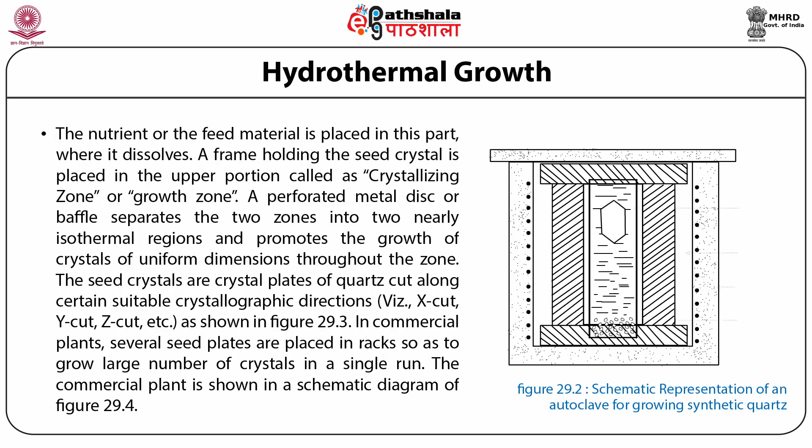The seed crystals are crystal plates of quartz cut along certain suitable crystallographic directions, namely X cut, Y cut, Z cut, etc., as shown in figure 29.3. In commercial plants, several seed plates are placed in racks so as to grow a large number of crystals in a single run. The commercial plant is shown in a schematic diagram in figure 29.4.

After the vessel is charged with solvent to the percent of fill desired, it is closed and placed in a furnace that gives the desired temperature and temperature differential. The moment the temperature of the vessel reaches the operating conditions, the nutrient quartz starts dissolving and saturating the solution.

Circulation results from convection currents, since the hotter zone is arranged to be at the lower part of the vessel. When the solution rises into the cold region of the vessel, that is the upper part, it can no longer hold all the dissolved material in solution and the excess gets deposited on the seed plate.

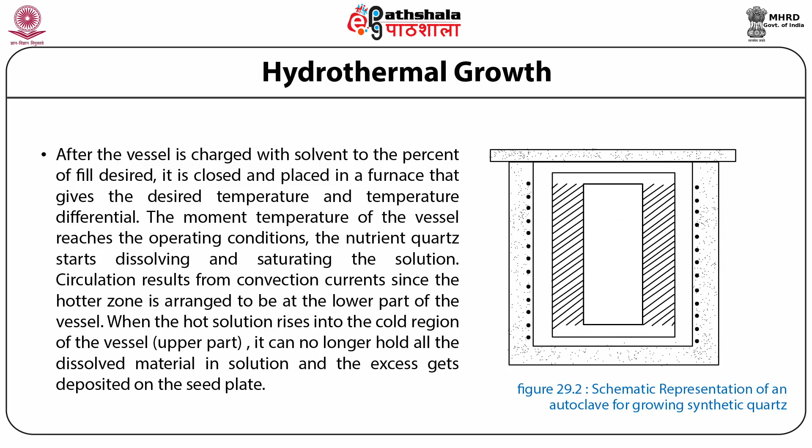The seed plate begins to grow in size. Replenishment is influenced by the baffle arrangement as it transports newly saturated solution away. This continuous cycle of solution and deposition permits the growth of large crystals.

The rate of growth depends on temperature, pressure, the temperature difference delta T between the top and bottom of the autoclave, and the amount of mineralizer present. The actual conditions used for the growth of quartz are to be compromised, in which various factors are balanced to provide the best possible material at a realistic production rate and cost basis.

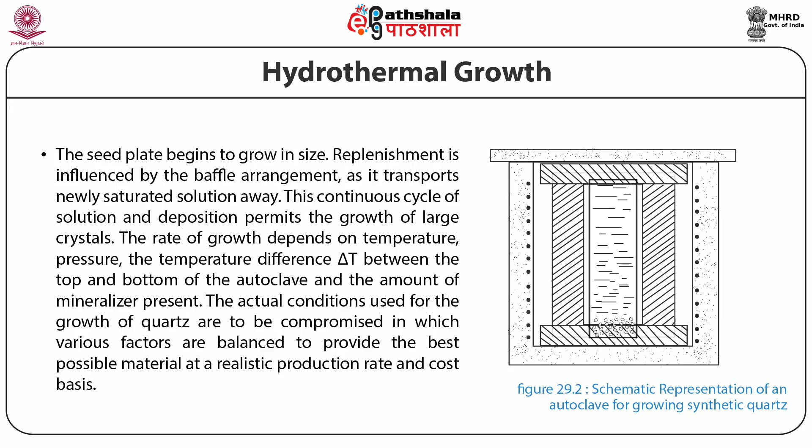Figure 29.3 shows the model of a quartz crystal, showing the different directions of cutting to produce oscillator plates of different characteristics, also used as seed plates for growing synthetic quartz.

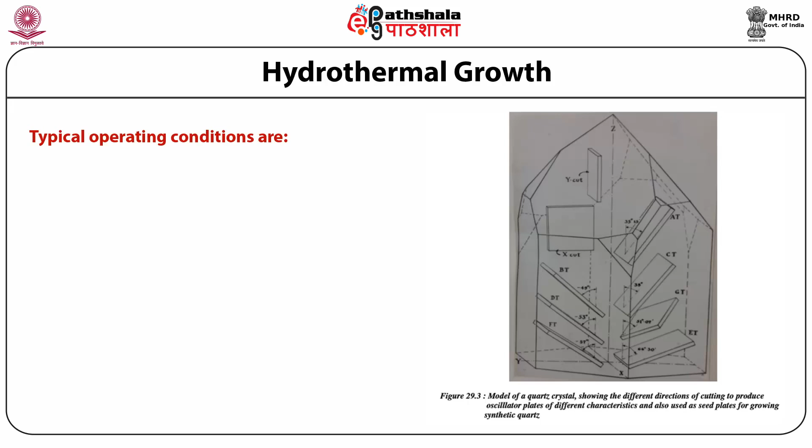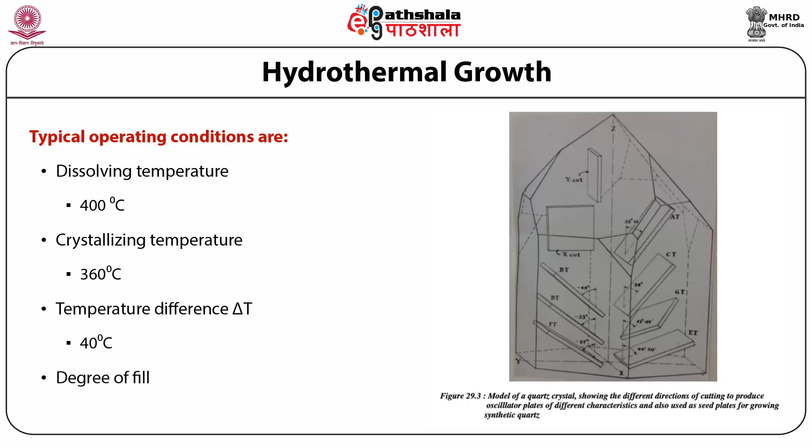Typical operating conditions for the growth of quartz are: dissolving temperature 400 degrees centigrade, crystallizing temperature 360 degrees centigrade, with temperature difference delta T maintained at 40 degrees centigrade. The degree of fill is around 80%, using an aqueous alkaline solution of 1 molar sodium carbonate or sodium hydroxide.

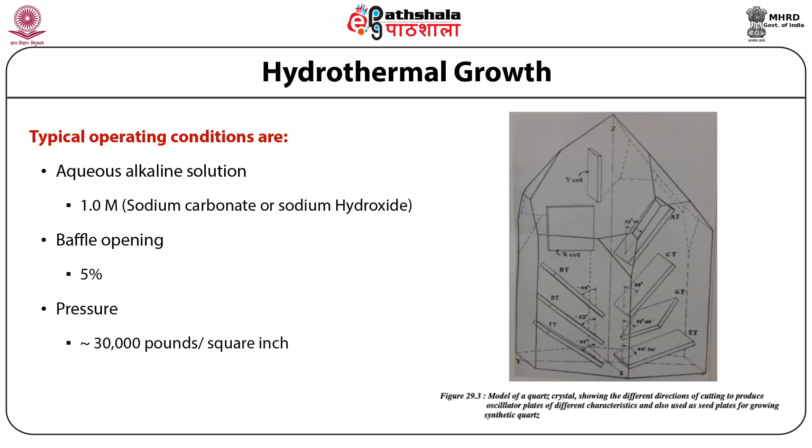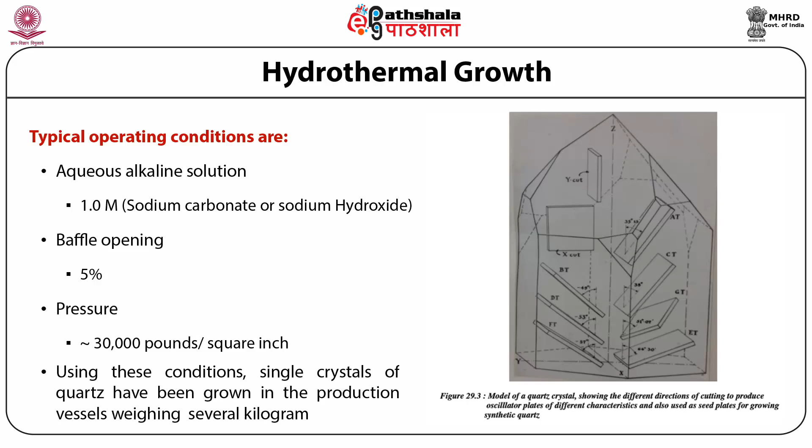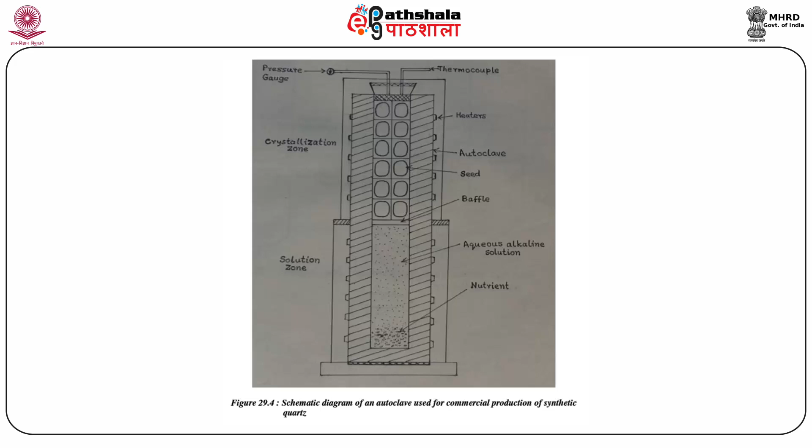Baffle opening is kept at 5%, and the pressure is maintained at approximately 30,000 pounds per square inch. Using these conditions, single crystals of quartz have been grown in production vessels weighing several kilograms. Figure 29.4 is a schematic diagram of an autoclave used for commercial production of synthetic quartz.

Let us talk about mineralizers. The materials grown by the hydrothermal method have either negligible solubility in water or are slightly soluble in water. To increase their solubility, some substances are added. These substances are called mineralizers.

The mineralizers usually used for this purpose include both alkaline and neutral substances. The alkaline substances are sodium hydroxide and sodium carbonate, whereas the neutral substances include ammonium chloride (NH4Cl), potassium chloride (KCl), sodium chloride (NaCl), and so on. In the growth of certain crystals, acid solutions like hydrochloric acid (HCl), sulfuric acid (H2SO4), and HI are also used.

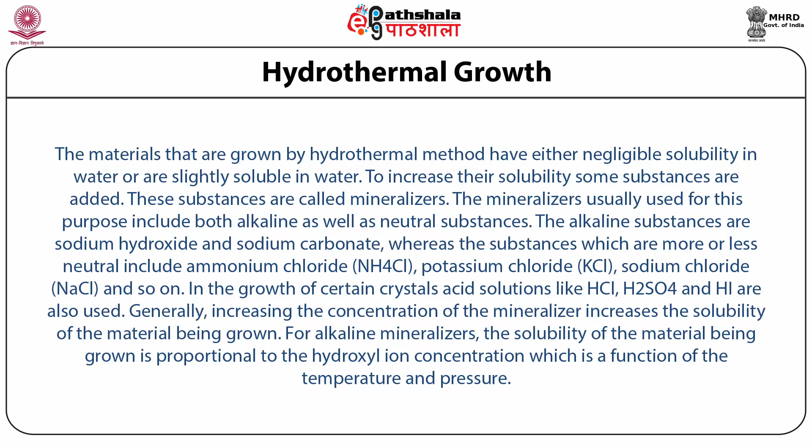Generally, increasing the concentration of the mineralizer increases the solubility of the material being grown. For alkaline mineralizers, the solubility of the material being grown is proportional to the hydroxyl ion concentration, which is a function of temperature and pressure.

Some typical mineralizers under specific conditions are given in table 29.1. This table has four columns: one for the crystal, one for the mineralizer, the third for growth temperature in degrees centigrade, and the fourth for temperature difference, delta T in degrees centigrade.

The first example is SiO2, quartz crystal, for which the mineralizer is 1m NaOH. The growth temperature is maintained at 375 degrees centigrade, and the temperature difference, delta T, is 40 degrees centigrade. For the crystal Al2O3, the mineralizer is...

1m K2CO3. The growth temperature is 490 degrees centigrade, and the temperature difference is maintained at 50 degrees centigrade. For PbTiO3, the mineralizer is 1m KF, growth temperature is 600 degrees centigrade, and the temperature difference is maintained at 35 degrees centigrade.

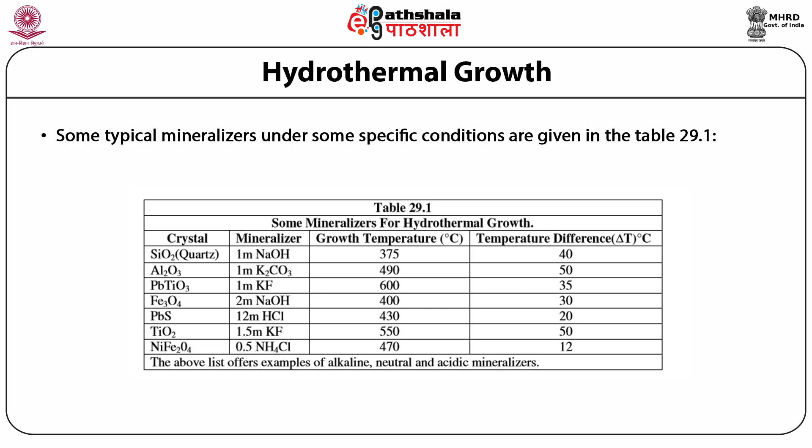For the growth of NiFe2O4, the mineralizer used is 0.5m NH4Cl. The growth temperature is maintained at 470 degrees centigrade, whereas delta T is maintained at 12 degrees centigrade. The above list offers examples of alkaline, neutral, and acidic mineralizers. Now we shall talk about advantages of hydrothermal crystallization.

Hydrothermal crystallization offers the following advantages. First, in hydrothermal growth, one usually refers to a high temperature of crystallization. However, in reality, this temperature is often rather low compared to the melting point of the material. It is this relatively low crystallization temperature that makes the technique an attractive means of crystal growth.

Second, the dislocation density of a hydrothermally grown crystal is less than melt-grown crystals. This is because in hydrothermal synthesis, crystals grow under less thermal strain, whereas in melt growth, large thermal gradients are present. This low temperature also permits the growth of low temperature polymorphs, which are often unattainable by other means.

Third, hydrothermal growth uses a closed system, in which the atmosphere may be controlled to produce oxidizing or reducing conditions. Fourth, in this technique, one can achieve a comparatively rapid rate of growth.

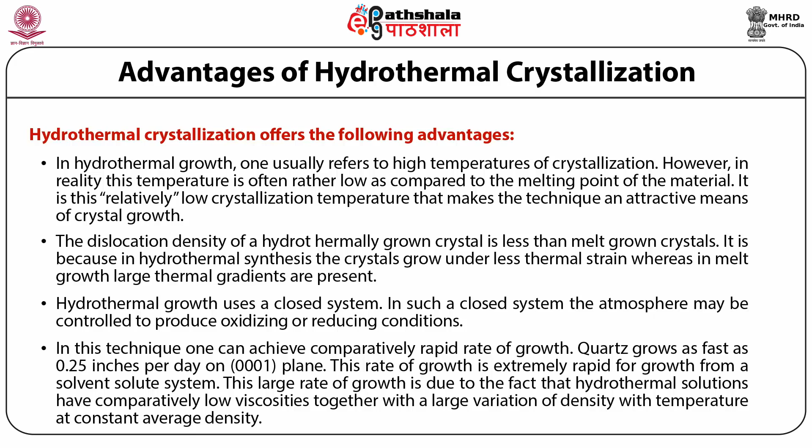Quartz grows as fast as 0.25 inches per day on the 0001 plane. This rate of growth is extremely rapid for growth from a solvent-solute system. This large rate of growth is due to the fact that hydrothermal solutions have comparatively low viscosities, together with a large variation of density with temperature at constant average density. This results in rapid convection and very efficient solute transport, permitting large growth rates.

Now let us discuss disadvantages of hydrothermal crystallization. This technique suffers from certain disadvantages, summarized as follows. First, the need for a well-designed high-pressure vessel with a reliable closure capable of withstanding the high pressure generated at operating temperatures.

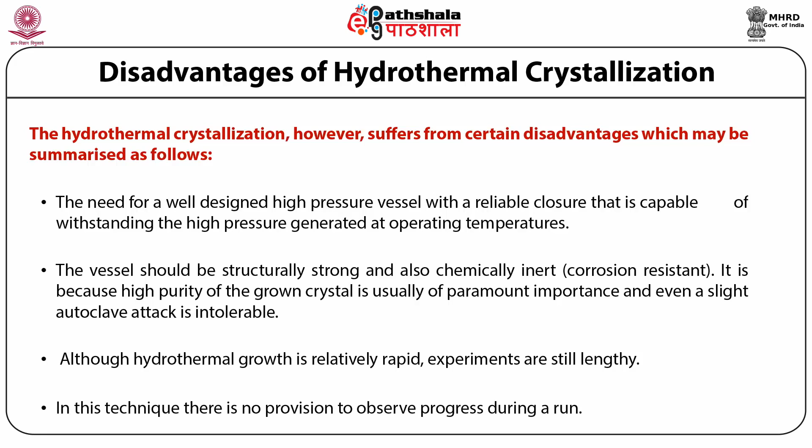Second, the vessel should be structurally strong and also chemically inert, that is, corrosion resistant, because high purity of the grown crystal is usually of paramount importance, and even a slight autoclave attack is intolerable. Third, although hydrothermal growth is relatively rapid, experiments are still lengthy. Fourth, in this technique, there is no provision to observe progress during a run.

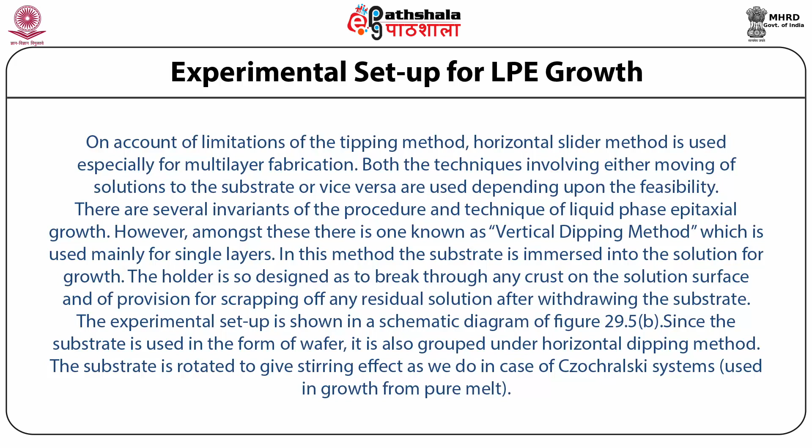The experimental setup is shown in the schematic diagram of figure 29.5b. Since the substrate is used in the form of a wafer, it is also grouped under the horizontal dipping method. The substrate is rotated to give a stirring effect, as is done in Czochralski systems, which are used in growth from a pure melt.

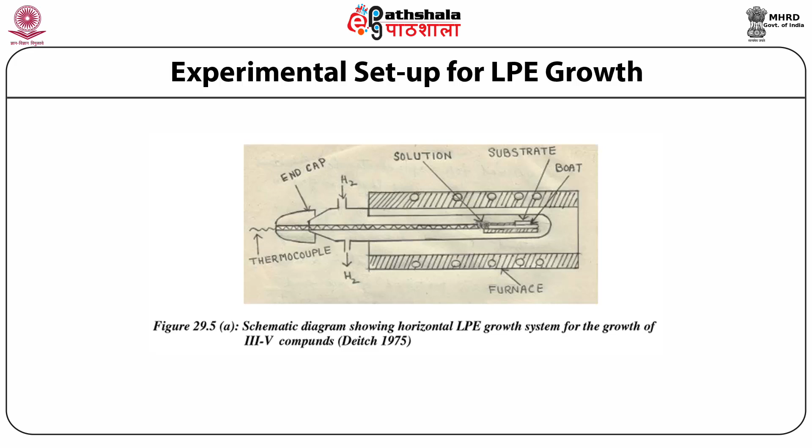Figure 29.5a is a schematic diagram showing a horizontal liquid phase epitaxial growth system for the growth of III-V compounds, as devised by Deitch in 1975. Figure 29.5b is the schematic diagram showing the vertical liquid phase epitaxial growth system used in magnetic garnet growth, as devised by Ghez and Giess in 1974.

Horizontal dipping is used for the growth of semiconducting crystals. However, there are two difficulties because of which the use of this technique is rather rare. The main problems are as follows. First, it is difficult to design substrate holders which provide undistorted flows in semiconductor solutions, on account of the limited range of compatible materials. Second, semiconductor solutions are much less stable in the supercooled state compared to oxide or halide-based solutions. Because of this, spurious nucleation is very common in semiconductor solutions.

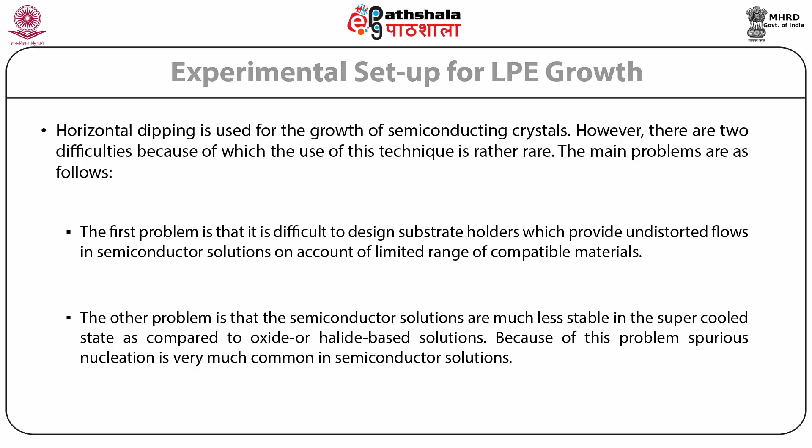The major uses of LPE growth are as follows: use in growth of layers where purity is of utmost importance, as required in the case of semiconducting layers; and use in the growth of materials where practical alternative techniques are not available, as in the case of magnetic bubble devices.

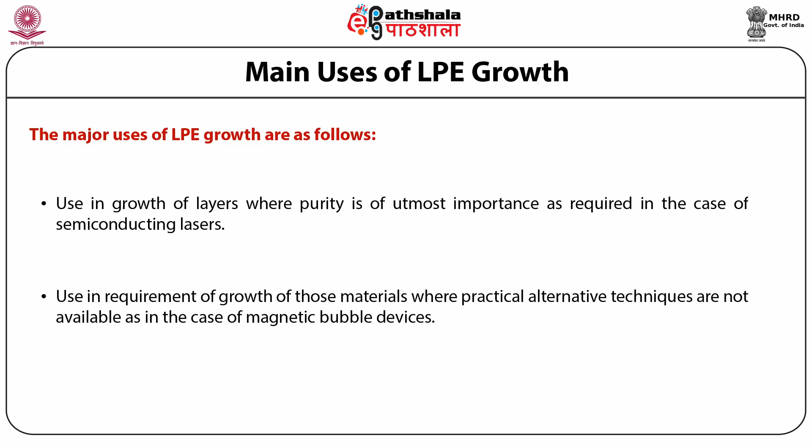Nucleation does occur at appreciable rates at some temperatures, so the eta versus temperature T curve must therefore have a maximum. If a liquid is cooled so fast past this maximum that no nuclei get time to form, it becomes a glass.

Let us discuss dependence of growth rate on cooling procedures. Dependence of temperature T with time on growth rate for the above said cooling procedures, which includes ramp cooling, step cooling, and pre-cooling, is shown in figure 29.6 A, B, and C.

The effect on the growth rate, represented by small v, with time small t, corresponding to each of the cooling procedures, is shown in figure 29.6 A prime, B prime, C prime respectively. In these diagrams, the time small t equal to 0 is taken at a time when the substrate is brought into contact with the solution.

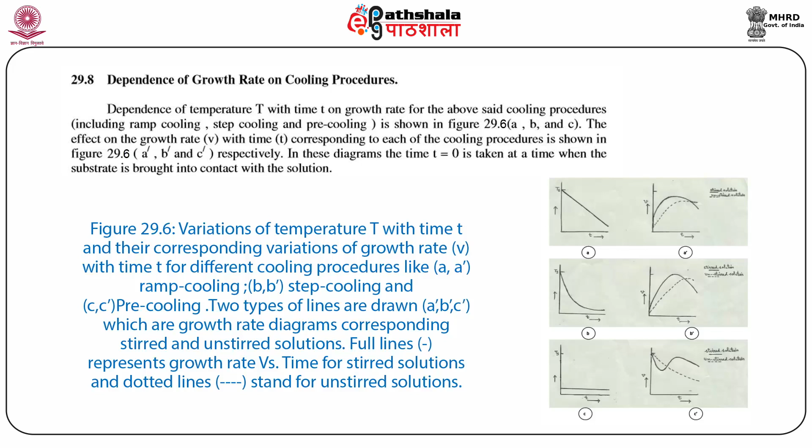Figure 29.6 A, B, C and A prime, B prime, C prime show variations of temperature T with time small t and their corresponding variations of growth rate, represented by small v, with time t, for different cooling procedures: A prime, ramp cooling; B prime, step cooling; C prime, pre-cooling.

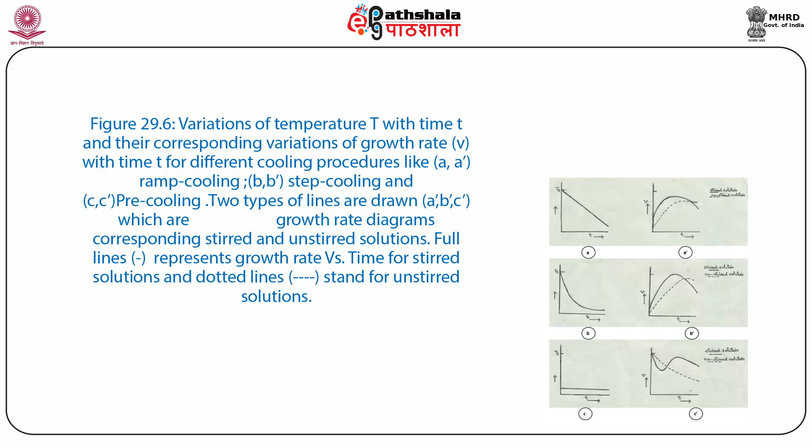Two types of lines are drawn in A prime, B prime, C prime, which are growth rate diagrams corresponding to stirred and unstirred solutions. The full line in these diagrams represents growth rate versus time for stirred solutions, and the dotted lines stand for unstirred solutions.

Let us discuss each of the curves of temperature capital T versus time small t for the three cooling procedures and the corresponding curves of growth rate versus time. Ts represents saturation temperature.

For the ramp cooling case, as represented by figure A, A prime, the growth rate is almost zero, which subsequently rises as the supersaturation increases. But after some time, it decreases.

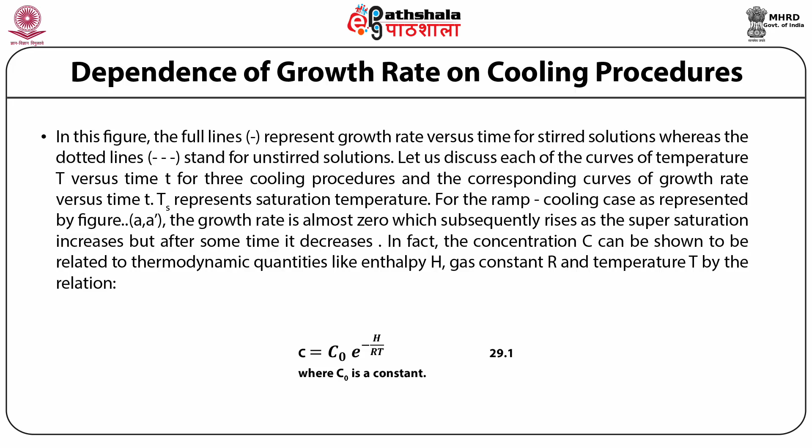In fact, the concentration capital C can be shown to be related to thermodynamic quantities like enthalpy H, gas constant R, and temperature T by the relation C is equal to C0 exponential of minus H upon RT, given as equation 29.1, where C0 is a constant.

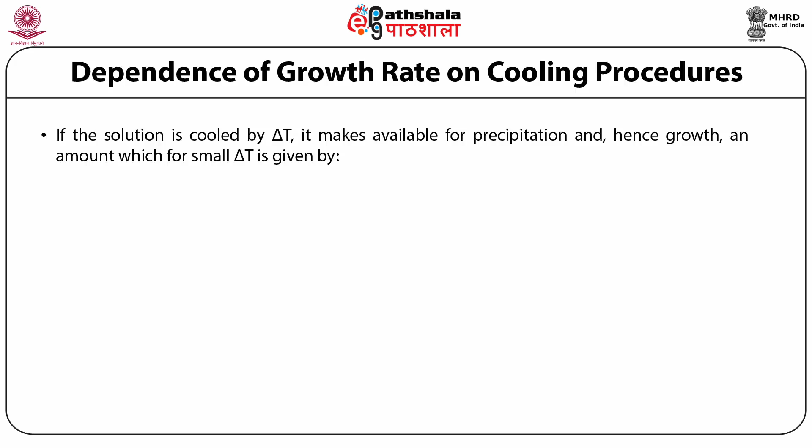If the solution is cooled by delta T, it makes available for precipitation and hence growth an amount which for small delta T is given by delta C approximately equal to C0 H delta T upon RT square into exponential of minus H upon RT, given here as equation number 29.2.

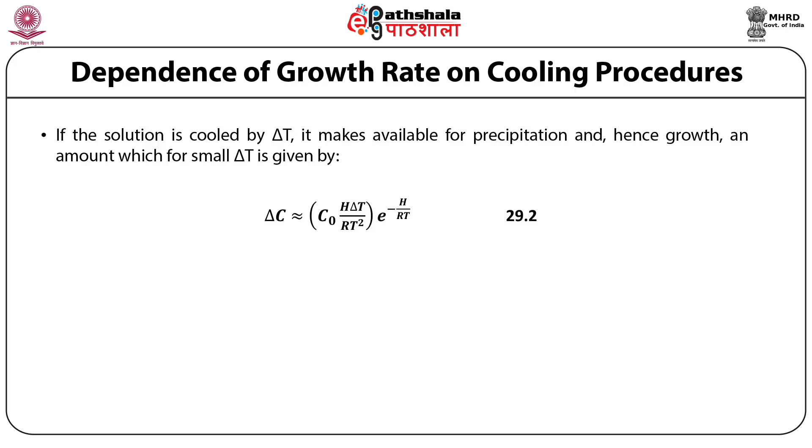For a given delta T, delta C will decrease as capital T decreases. There is a possibility of cooling faster as T falls to cancel this effect. However, an initial transient will always occur.

If cooling is done stepwise, the same initial transient effect will occur, but additionally, with the passage of time, the solution gets exhausted, and for long growth periods, the growth rate decreases. The said solution exhaustion does happen when pre-cooling is done.

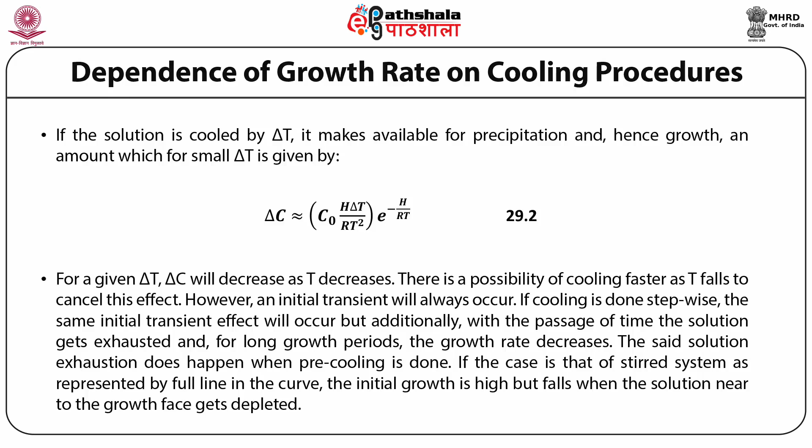In the case of a stirred system, presented by the full line in the curve, the initial growth is high, but falls when the solution near the growth face gets depleted. It continues for a time given by the expression delta square D by D, where delta represents solute boundary layer thickness and D is the diffusion coefficient.

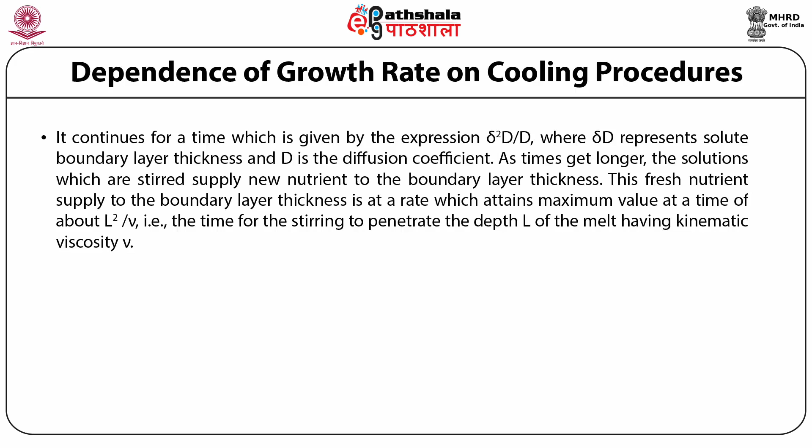As time gets longer, stirred solutions supply new nutrient to the boundary layer. This fresh nutrient supplied to the boundary layer is at a rate which attains maximum value at a time of about L square upon v, that is the time for the stirring to penetrate the depth L of the melt having kinematic viscosity small v.

The detailed theory of this process is given in the references cited here and are suggested for any extra information on the subject matter: Brice J.C. in 1976 in Crystal Growth and Materials, edited by E. Kaldis and H.J. Scheel, North Holland, Amsterdam, chapter 11.3; Elwell D. 1976 in the same volume, chapter 11.6; and Elwell D., Scheel H.J., 1975, Crystal Growth from High Temperature Solution, Academic Press, New York.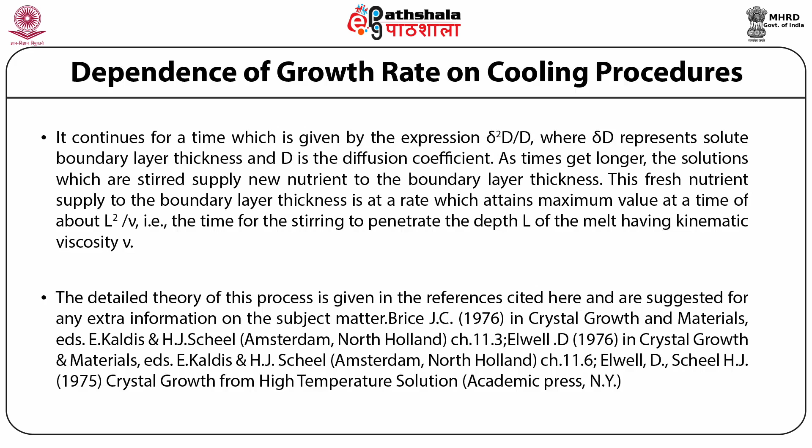High pressure growth technique has been applied for the crystallization of diamond. The first confirmed synthesis was reported in 1955 by the General Electric Company in the USA. Very high pressure is needed for diamond synthesis, but pressure alone is not adequate since the growth rate must be kept rapid enough using high temperatures. In practice, temperatures of 2000 degrees centigrade or more and pressures above 1 million pounds per square inch are used. Growth can be extremely rapid, a few seconds being sufficient under some conditions.

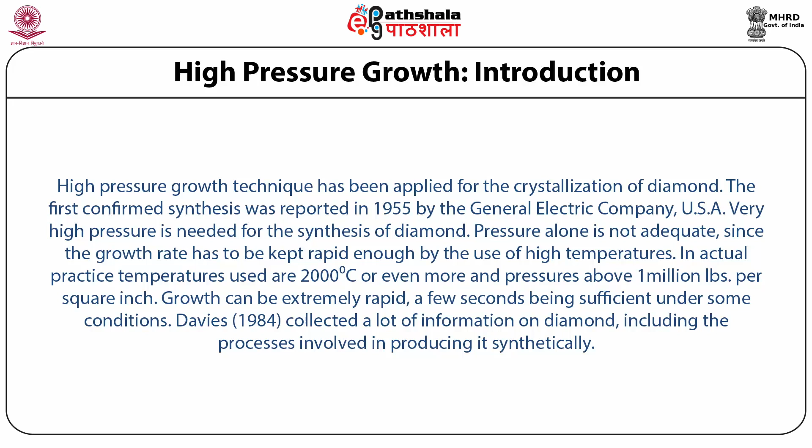Davies in 1984 collected a lot of information on diamond, including the processes involved in producing it synthetically. Now let us see the apparatus used. The equipment for such high pressures consists of large hydraulic presses with dies of special high-strength alloys, concentrating large pressure onto very small volumes, typically less than 1 cubic inch. The natural mineral pyrophyllite is used as a gasket material since it deforms to transmit high pressure but does not extrude out of the high pressure region. Electric current is passed through the growth region via insulated press plungers for heating the system.

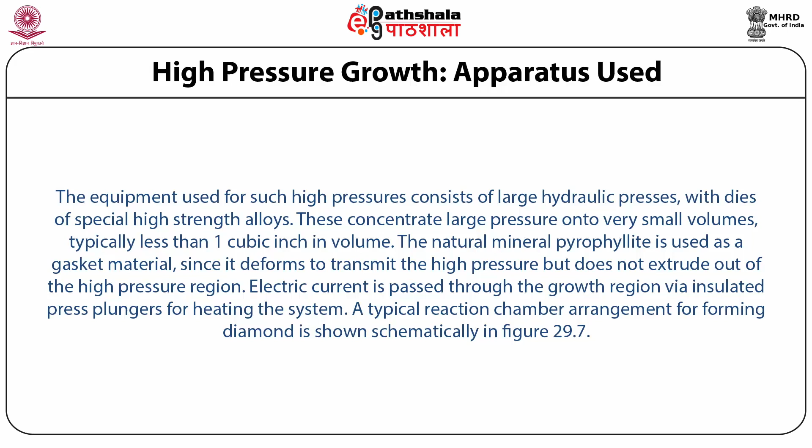A typical reaction chamber arrangement for forming diamond is shown schematically in Figure 29.7, a schematic diagram showing the reaction chamber arrangement for the synthesis of diamond.

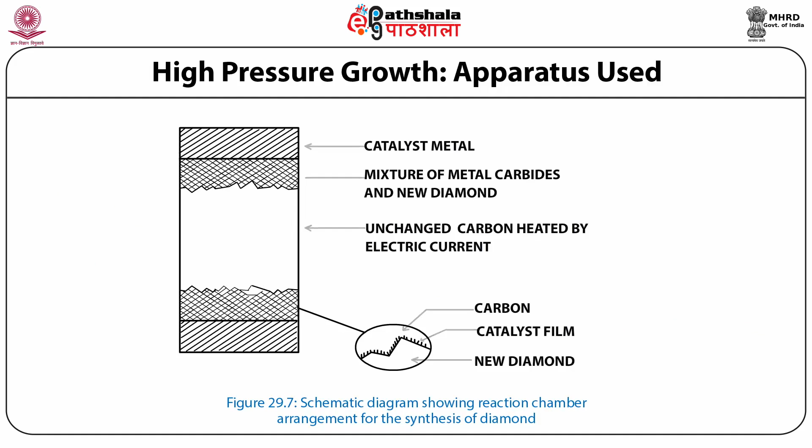We shall now talk about liquid encapsulation Czochralski growth, abbreviated as LEC growth. When crystals having volatile components are to be grown, a different set of problems come up. LEC is a technique under the category of crystal pulling techniques, developed to overcome one of the main material limitations of crystal pulling, namely that the material to be grown requires a relatively low vapor pressure. It is widely used for the growth of 3,5 semiconductor compounds such as gallium arsenide, indium phosphide, and gallium phosphide.

Consider growth of gallium arsenide. The solid with the maximum melting point, to the tune of 1238 degrees centigrade, is in equilibrium with arsenic vapor at a partial pressure of about 1 atmosphere. The arsenic vapor needed is mostly As2. This can be provided by an arsenic source maintained at a temperature of 612 degrees centigrade, and the system should not contain any region cooler than the arsenic source.

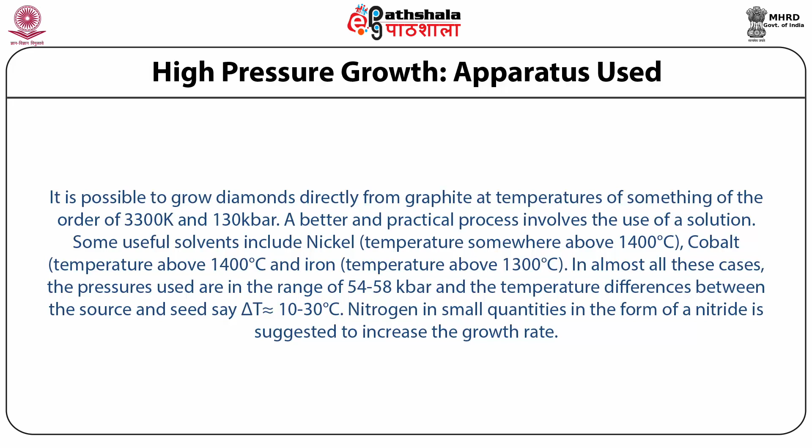In almost all these cases, the pressures used are in the range of 54 to 58 kilobar, and the temperature difference between the source and seed, delta T, is of the order of 10 to 30 degrees centigrade. Nitrogen in small quantities, in the form of a nitride, is suggested to increase the growth rate. Figure 29.8 is a schematic diagram showing the apparatus used to grow diamond crystals.

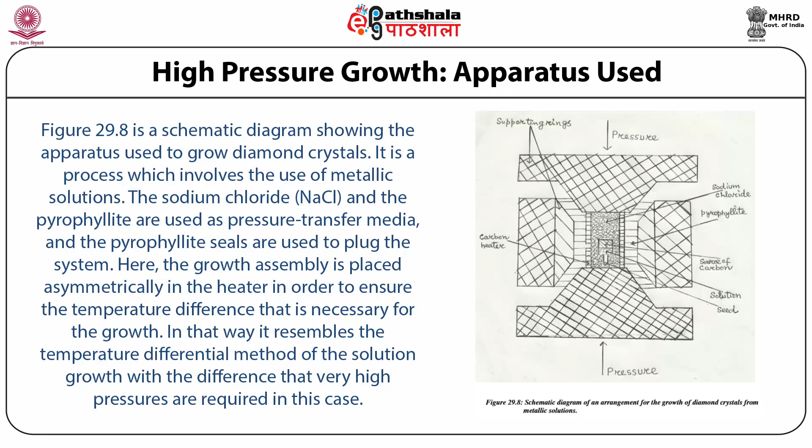It is a process which involves the use of metallic solutions. Sodium chloride (NaCl) and pyrophyllite are used as pressure transfer media, and pyrophyllite seals are used to plug the system. Here, the growth assembly is placed asymmetrically in the heater to ensure the temperature difference necessary for growth. In that way, it resembles the temperature differential method of solution growth, with the difference that very high pressures are required in this case. Figure 29.8 is a schematic diagram of an arrangement for the growth of diamond crystals from metallic solutions.

So students, let us summarize what we have learned in this module. We have learned about the hydrothermal crystallization technique, particularly concerning the growth of quartz. The requirements of mineralizers is also explained, along with the advantages and disadvantages of the hydrothermal method. Liquid phase epitaxial growth and the apparatus used are described, particularly for the growth of 3,5 compounds and magnetic garnets. Dependence of growth rate on cooling procedures, including ramp cooling, step cooling, and supercooling, is discussed. Reaction chamber arrangement for the synthesis of diamond is described, and high pressure growth is discussed in general.